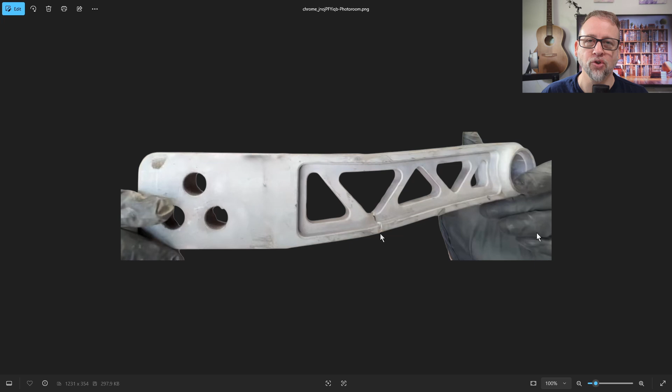CNC milled or something. So let's say that you had this bracket on your vehicle and you wanted to replace it. So you could order a new one. I think they're $250 for two or something like that.

But if you had access to a CNC, or if you wanted to make this out of steel, we could do it that way. So I'm going to show you how you can take this image and we can import it and we can do some sketches and make this part ourselves in 3D. And then, possibly you could 3D print it.

3D print is not going to be strong enough, but then you could use this for fitting purposes and stuff like that if you wanted to. But the final product, you can CNC it, or grind it, whatever, however you want to make it.

So your manufacturing method. So I'm going to take this image, and I found a better image of it without the crack and in a better orientation. So let me show you that one. And this guy is here. It's slightly different, but essentially it's the same thing.

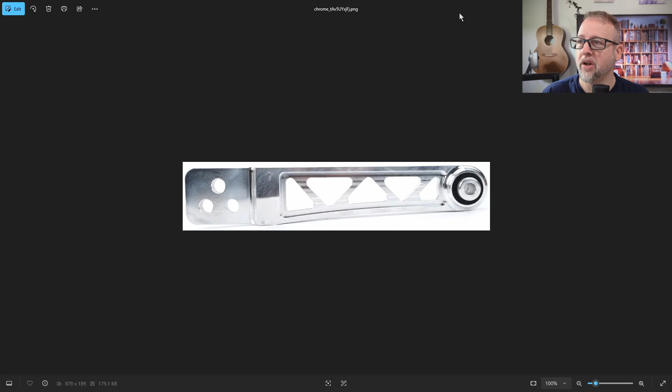A lower control arm. So what I want to do is I want to import this image into Onshape. So I'm going to do that now. So I have Onshape here.

This is a free subscription and allows for public data. So if you save anything on this, it's public data and anybody can access this data for free. All right, I will go to create new document and I will name this document, just 'Control arm, paste that lower control arm.'

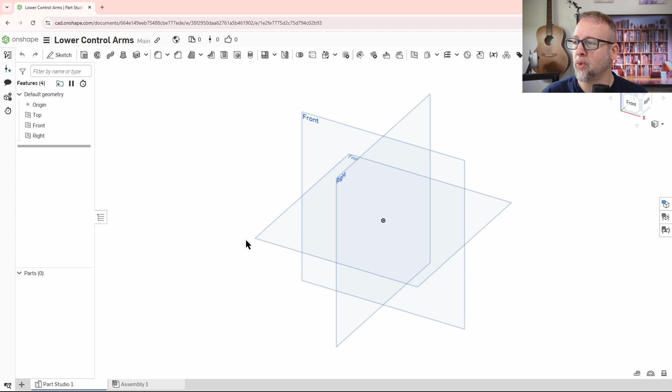Okay, so now I want to paste it onto one of these faces right here, one of these planes. So right now I want to hide one of these. So I'm going to click on this little eyeball, or I can actually click on this, left click, right click, and then hide that right plane.

Okay, now I want to go to my front plane and I can take this and I can drag this down if I want to. I like to do that. Let's go with the front plane and we will insert our image now.

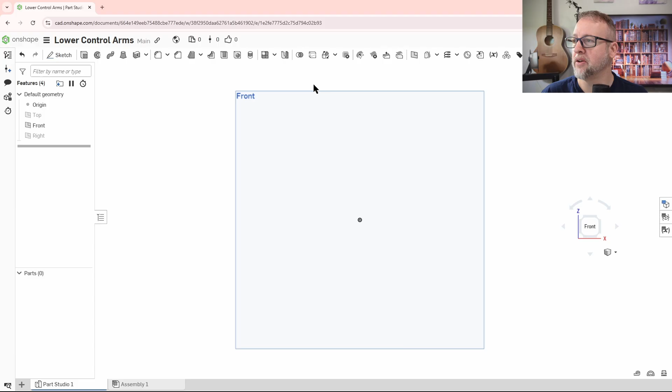All right, let's go to create a sketch. So create a sketch on this surface right here. So I just hit sketch, hit this plane right here, and it creates sketch one. Okay, so now we go over here to this DXF and we want to insert image.

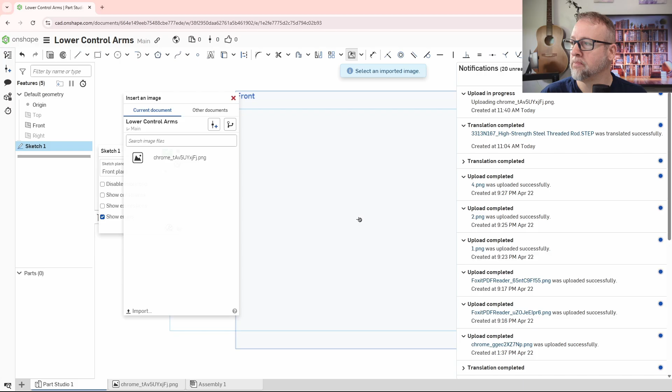All right, so we will go to import and we will import that nice flat image. We will click on this guy right here. We'll click on the little dot right there and we're going to throw him in there. Okay, so click, hold, just drop it in there.

So now the first thing is, I don't know the true size of this. I'm just taking a guess. So this is just to show you how it's possible to do this. So let's say these are 8mm holes.

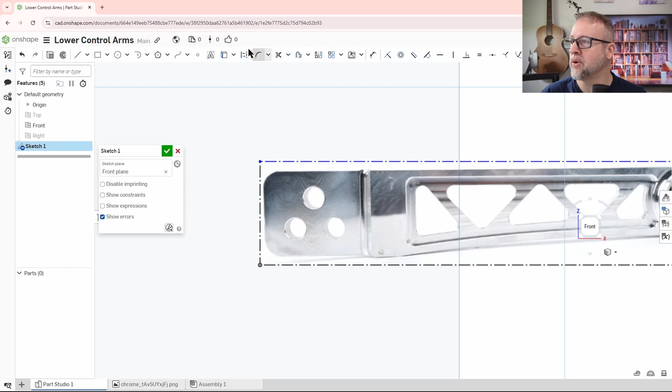Okay, so what I want to do is I want to create a hole. I'm going to go over here, create a center point and click here and go to about... actually that 8mm almost popped up perfectly. So let me take that.

I'm going to drag this over here. Not that, Control Z to get out of that. And yeah, we just got to get out of that circle. So we can just click on that, as long as we're out of that circle, it was in the circle.

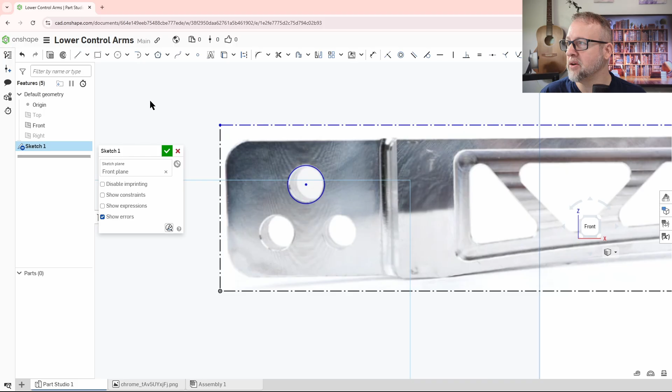So now uncheck that, it's not selected anything. Now I can do this. Okay, so I think this is the proper size. Let me go to the dimension here. Click on this guy.

Click on that guy. We want to change this to 8mm. All right, see how it's scaled automatically. So everything was made a little bit smaller, and that is the scaling function.

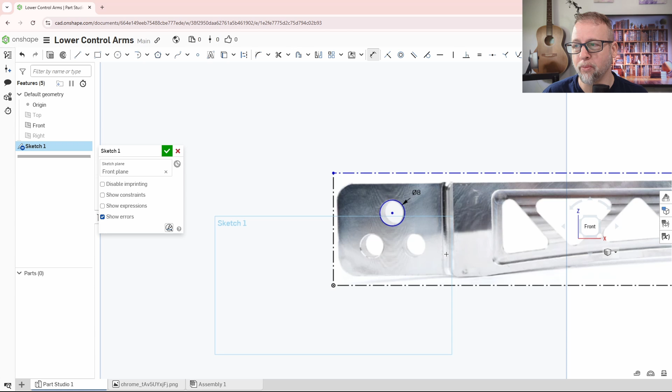So now we're just going by that. I don't know the true size of this, so I'm just doing this for learning and teaching purposes. So what I'll do now is start to sketch this guy out.

So this here, I want to... this is kind of locked in position. Click out of that. I want to fix this into position, I don't want it to move. So fix that guy, he's stuck. He shouldn't be able to move, so the scale should not move.

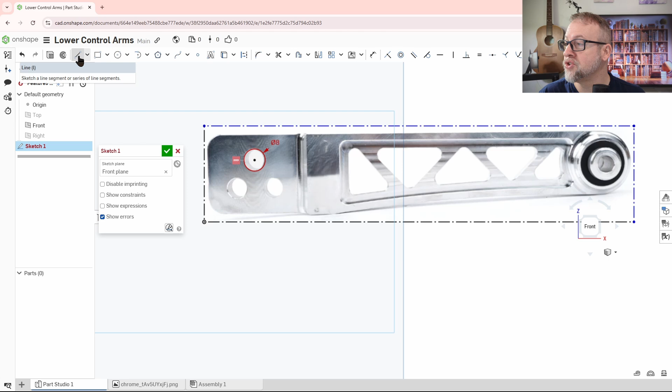So now I can go do some tracing around this guy. Let's click here, we're going to do some tracing. If you hover over here, you can get that to curve automatically. I'm going to build this semi-straight and go about right there, and then looks like it's got a little curve to it.

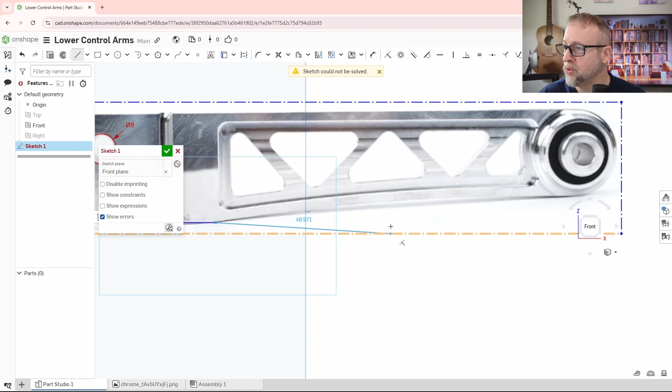I'm going to skip that curve. If you want to put a curve in, you could do a Bezier curve or spline here. So let's just create a straight line.

And then here I want to do a radius, okay? Let me not snap everything. See how it's not lining up perfectly? So what I can do is create a spline.

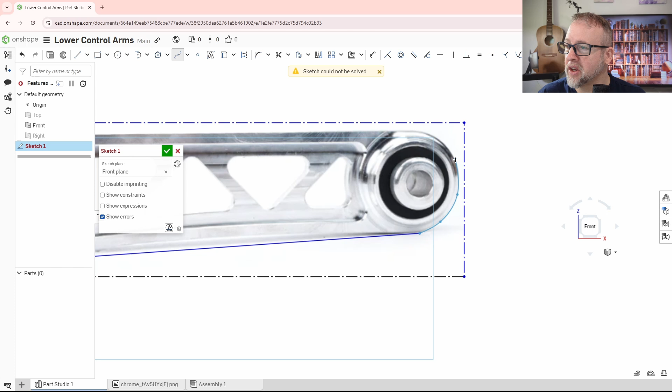It's probably best if you had this part in your hands, take some pictures of it, maybe a top view, a really good top view picture, and you'd be able to reverse engineer this much better. But I don't have a perfect top view - you can see this is slightly tilted, so that's telling me this is not perfectly top view. So it's a good start though.

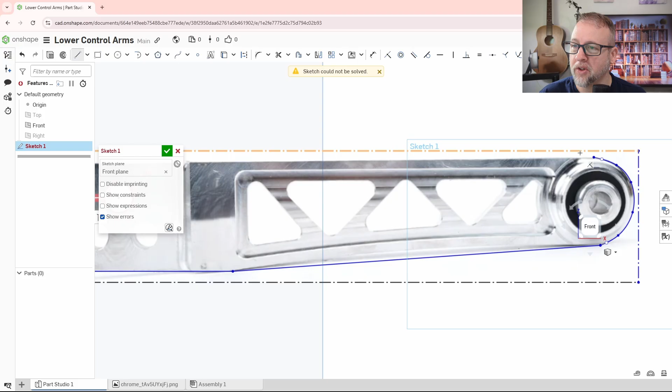So let me click here, let me keep going all the way down here. Looks like that top one is totally flat, and now I can hover over that one and get my curve going there. Then I can escape out of that, and that makes my first shape.

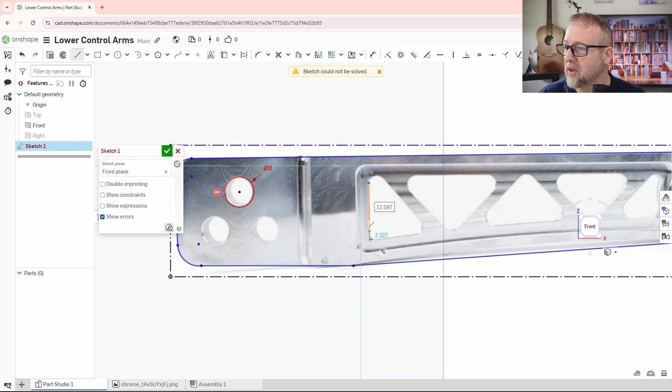So now I can extrude that as it is, or I can start filling out these little holes and stuff, so let's do those right now. Let's create some lines - L for line. I'll do this, and I'll do those afterwards. Hit L to get out, L here.

L, I'm just hitting L start, L stop. L to start the line, L to stop the line. So that's what I'm saying - L right there, L here to here.

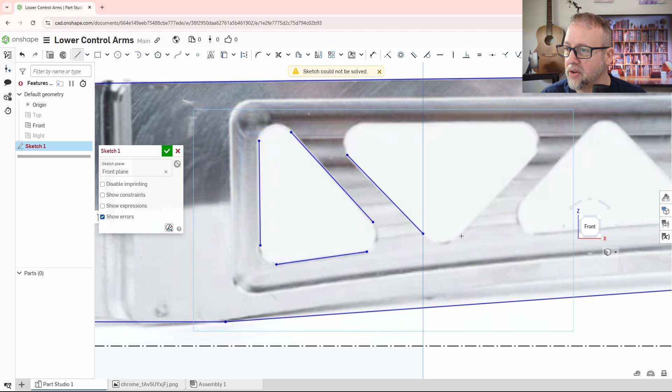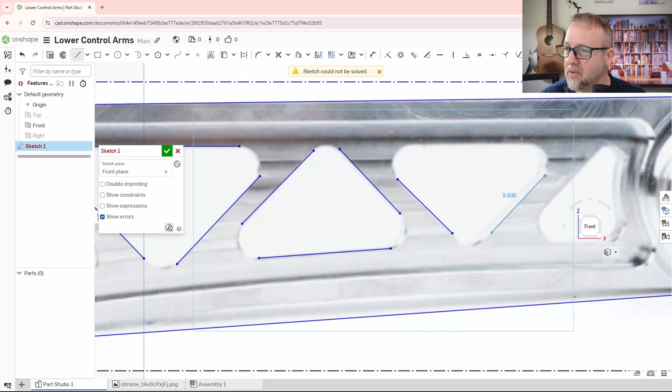And these are just for weight savings, probably. You probably don't even need to remove this material, because I don't think these most likely add any additional strength characteristics to this piece.

This one's a little bit round, so I'm going to choose a Bezier spline, just a spline, and try to create that shape right there. Get out of that, hit escape, I think - yeah, escape will do that.

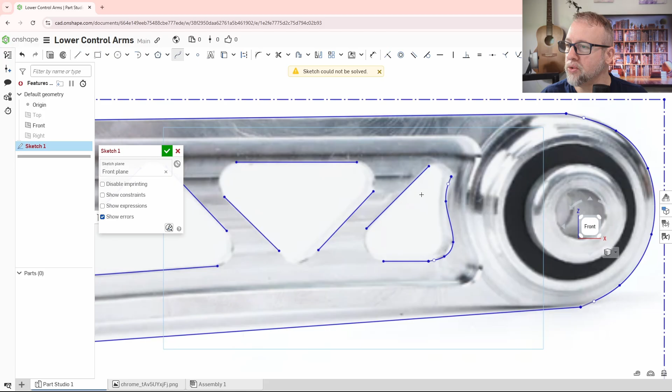So now we can put in these corners here. We can go here, click here, here, and then drag this guy to the size that we want, okay? That should do it. It doesn't - those two didn't connect, so that's why I didn't do that.

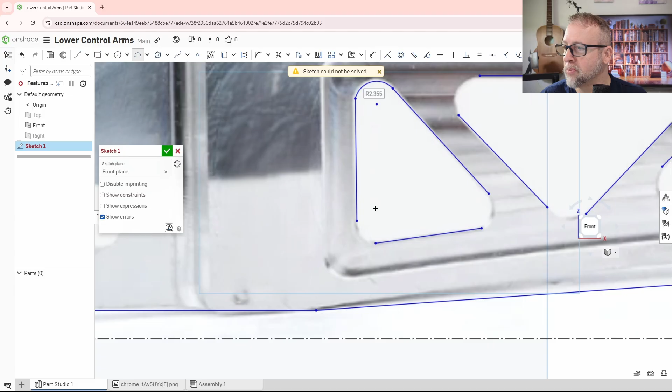Here's what we can do - we can choose a 3-point arc. So 1, 2, 3. Okay, it's not perfect, but it does work. 1, 2, 3, we can just match them up. That little sign popping up there means it's tangent - we'll keep that, we like tangency. Looks better whenever you see that.

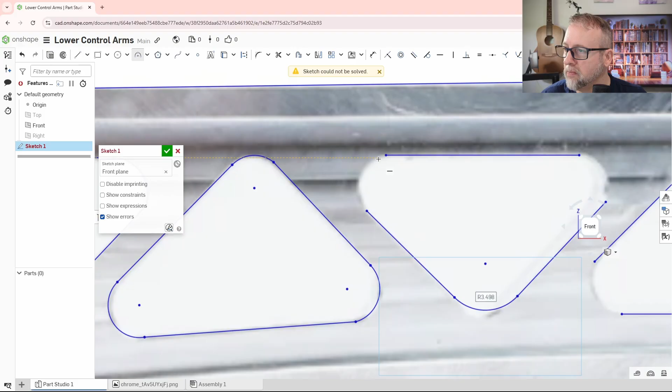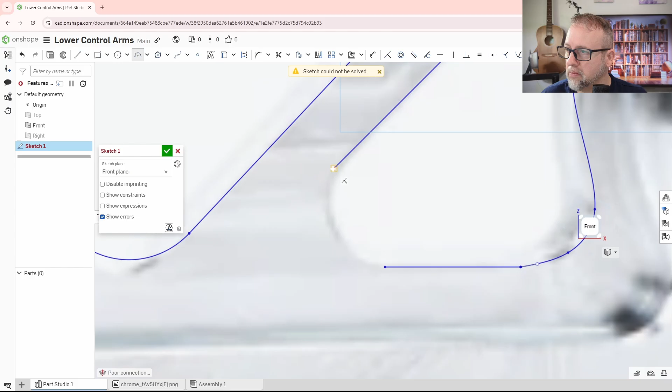That one kind of goofed. Fix that one. There we go. Perfect.

And there we are. All right, so now we're going to extrude this guy. I see that this popped out a little bit, but I can fix that in a minute. Actually, I want to create those little holes right there. It says it doesn't like that red area right there, so I'll delete this guy. Actually, no, I'm not going to delete that. I'm going to delete this guy right here, and that will fix that.

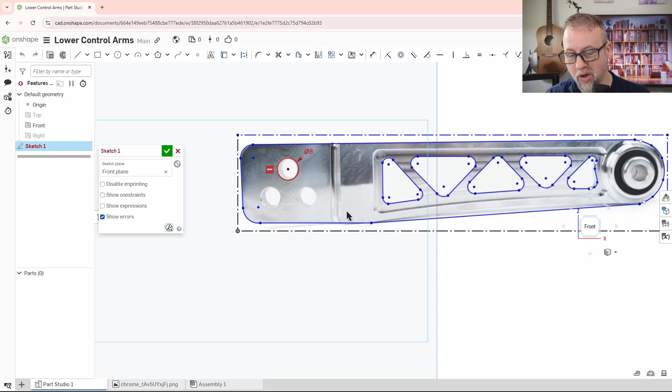Okay, so now let's put in 8mm holes here. We can fix the dimensions after. D for dimension, or click right there. 8.

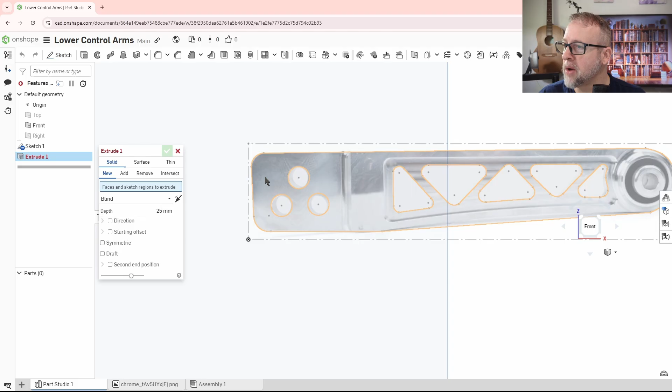8. All right, and then we can finish that. Now everything looks good, now I can do an extrude. We can grab this sketch and we can see it's extruding. We don't know the exact size of this, I don't have a thickness of it or anything like that, so I'm going to say 25 millimeters is probably correct. Let's go 20 millimeters and say that's going to be it. So there's our beginning piece of it.

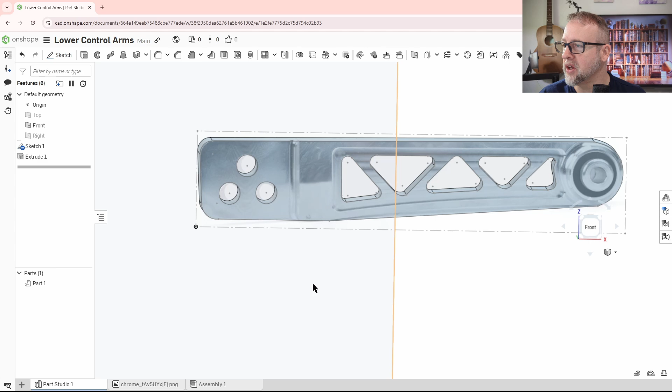See how it just hid the sketch from me, so I can click on the little eyeball to see my sketch again. And it shows me that we have some recesses going on inside of here.

So let me create another sketch on top of this surface now, and then I can sketch out that line right there. So let me go to sketch. I'm going to click on this face right here and go to my front view. I want to get it normalized. And now I want to create this outside edge right here.

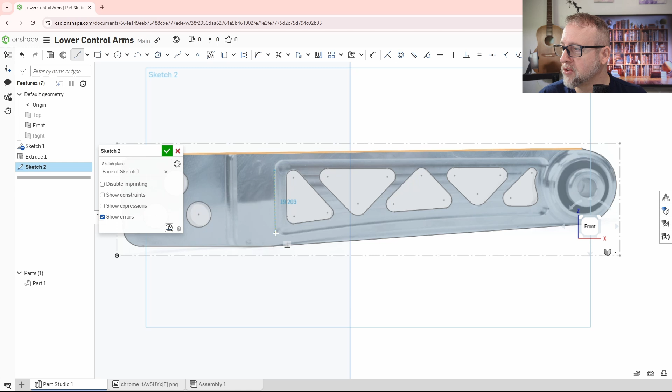So let's create—no, we're not going to create a box. A box looks like there's a little curvature going on. L to get out, L to start. This is a curve, I'm going to keep that curve. L, I'm going to go all the way over here. L to get out of that, and then I'm going to create a curve here.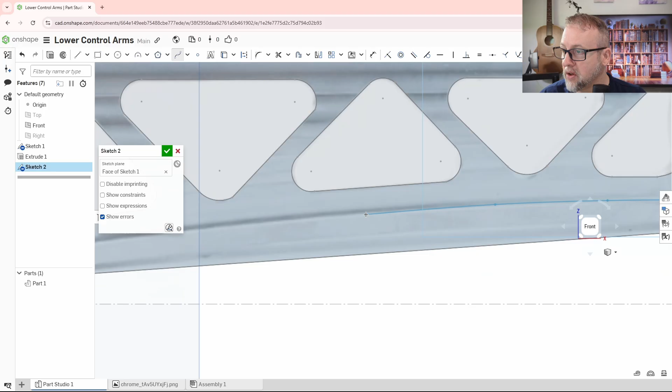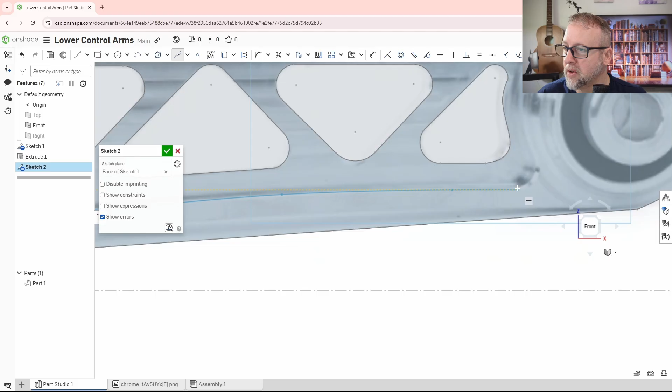So our spline—I keep calling splines curves, but yeah, here's what you can do. Just click and keep going, and we can adjust this afterwards. Click right there. Click on that to get out. Nope, don't do that, let's try that again. Spline. So we're going to hit escape on this next time. We can adjust these, like I said, afterwards if you want to. So escape to get out of that, and that got the right click, and we can confirm that spline.

Okay, so now we want to do this guy. We're going to do a spline here. Let's click right there, and then create this little line right here. I don't want it to be totally flat and horizontal. There we go. All right.

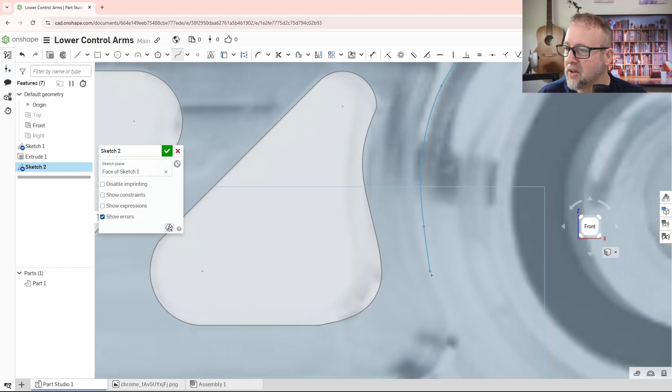So I'm just gonna—I can't really see it perfectly, so I'm just kind of going with what I think is there. This image could be a little better, could have more contrast, and confirm spline. Could have, you know, maybe it's painted black or something like that that has a little more contrast. Right now, this is a very shiny aluminum piece.

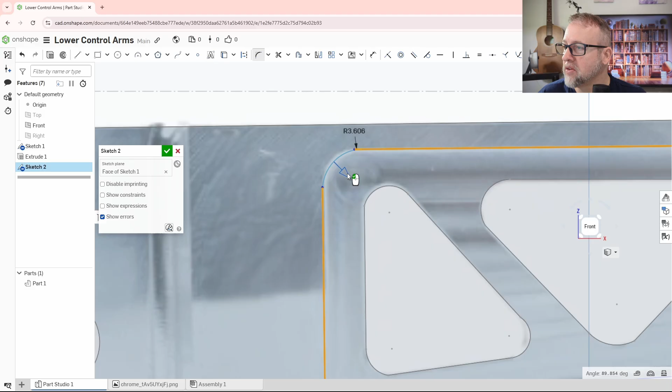So click there, and then we can drag that in. As long as he touches, he's good. Left click and then hit enter, get out of there, and then this should be the same size, I would assume. Let's try that one. Left click, enter, good. Okay, perfect.

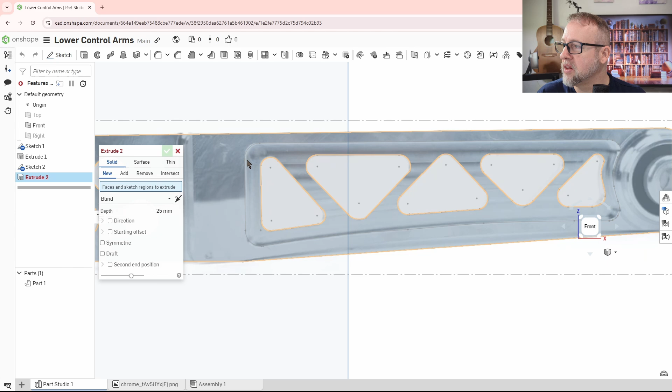All right, so now we can do an extrusion and then extrude this guy inboard and remove some material. Okay, so let's go to extrude, click on this guy right here, and we will do a remove. Okay, we're actually removing material. Let's say that's 10 millimeters down. All right, so let's take a look at the side view, and looks like it's cutting through that, which is good.

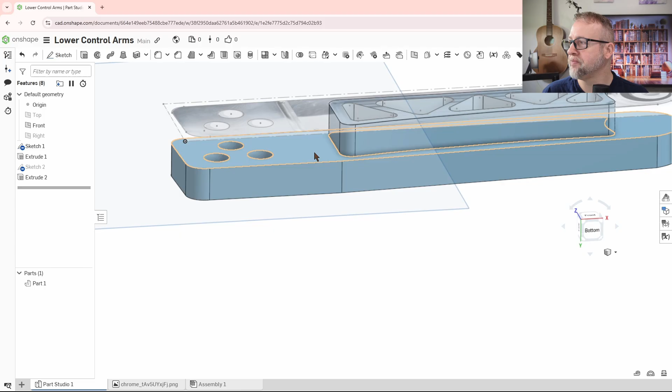Okay, and then merge with part 1. Yes, looks correct. Now part 1, for some reason, this guy looks like he changed size. So let me go back to that extrude. That's 10 millimeters, yes, that's good. I think I know what happened—so it extruded everything, extrude opposite of what I wanted. So let's go back to extrude, and we can click on that face, hold shift key down, and it should undo that selection right there.

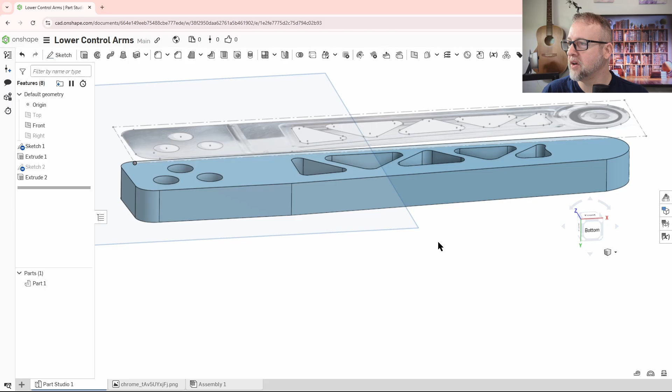Let's see if that worked. Nope, all right, I'm just going to delete this extrude. So delete, all right, let's go back to extrude. We're going to check and make sure it's only that inner area right there. Yes, that's it. Okay, and I'm going to remove, and I'm going to go down 10 millimeters.

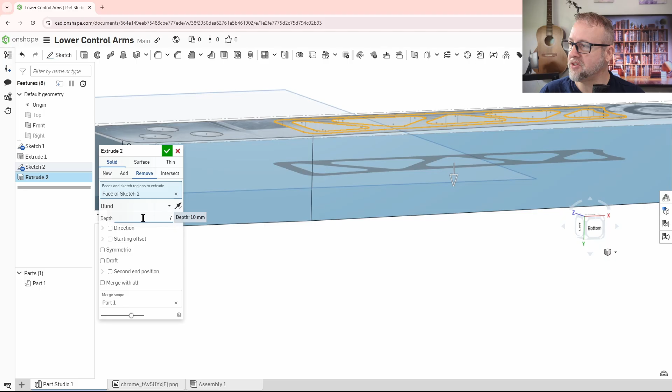We can do this twice if you want to, this side and the other side. That's probably the best idea. That looks a little bit deep, so I'm going to change that to, let's say, 7 millimeters. Okay, so that has just removed.

Let's hide the sketch and we can see this a little better. So click on the little eyeball, and now we see that is correct now.

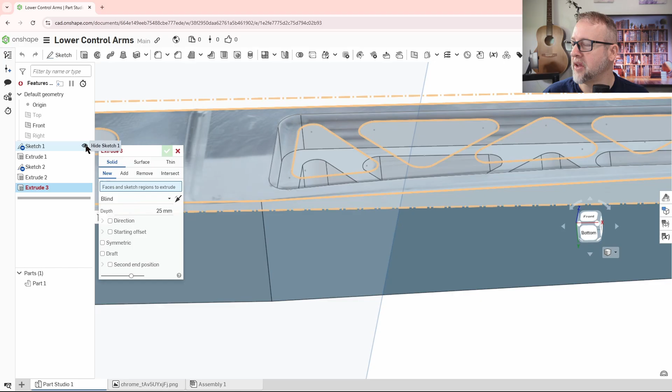Okay, so now if we want to do the same thing for the opposite side, we can just create another extrude, and if we don't see that sketch, we just make sure our eyeballs are on, do not have slashes through your eyeballs, so this is show. So we click on that right there, and now we can go down here and we want to do a starting offset.

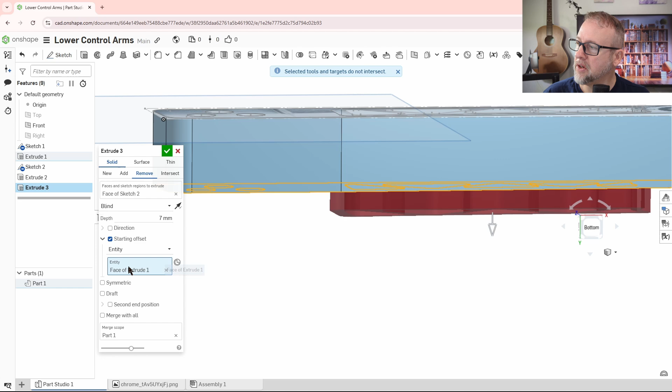Blind, we want to change that to entity. We want to click on the entity to start from. And then we want to change this to, I think we said 7mm, and we want to remove. Okay, so entity face, flip this. We want to flip that. There we go, so now it's taken into it, and there we go.

We got our two pieces. Now if that little sketch is bothering you, you can always click and hide that guy. So this is our piece now. Okay, now let's go back.

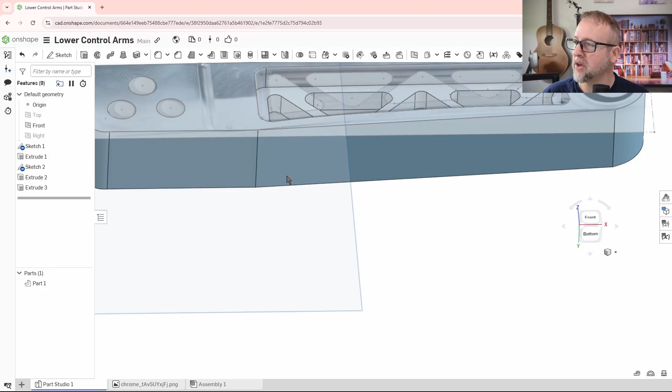We gotta look, and we got a hole over here, so let's create a little hole. And looks like we get some sort of change in height here. I'm not going to worry about that in this design. And this one right here is probably an 8mm hole, so let's go with a sketch.

I'm going to sketch on the surface right here. We're going to grab a lower little hole. We're going to click on front, get on there, slide this all the way over, and click right here.

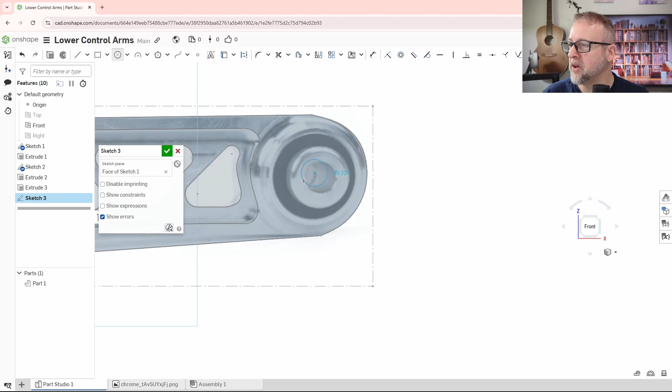Now this is the bushing. The bushing is going to go inside of there and hold it in there. So this may have to be modified. You know what, we're going to have to modify this to the outside surface size.

So let me grab a dimension here, and then I will click on this guy and let me put in like 15. Yeah, that's about right. It's close, so I don't know the true size. Let's say 16, but most likely it's a pressed fit bearing or bushing going in there.

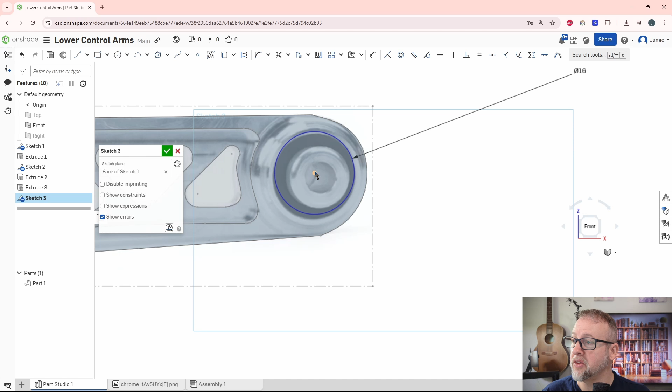Let me click on this guy. Nope, it doesn't, okay, I got to get out of that before I can actually grab it. So click on that right there. Click on this guy now, and now we can float this guy around. Okay, so click OK, so this is going to be extruded.

Extrude that guy all the way through. We're going to remove and say OK. It's going to go through the whole thing. I'm going to hide that sketch so we can see through it. All right, so that's our piece right now, our lower control arm, and we'll have to find out what size that bushing is that goes inside of there.

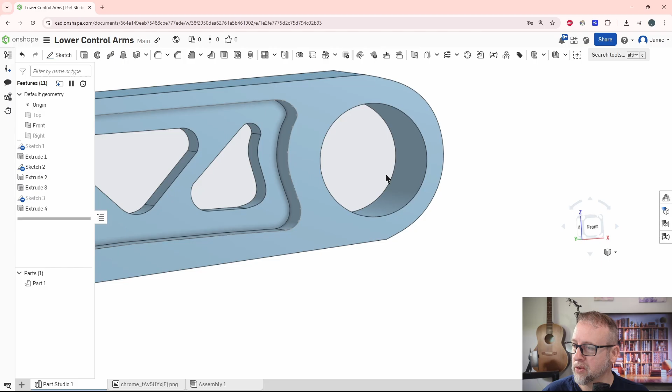And so this gives you a good starting point of how you can reverse engineer your things around for your vehicle or your house, and you can build these things from a picture. You should know the dimensions. If you have the physical part in your hand, you know the dimensions and size. You check a couple sizes and you take very good pictures of top views, side views, and front views, stuff like that, and you can get a very good representation and reverse engineer this part.

So hopefully this video was beneficial.